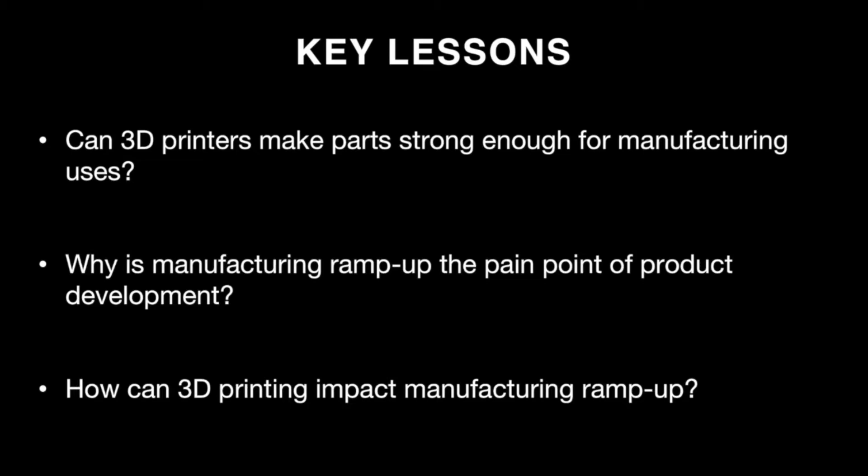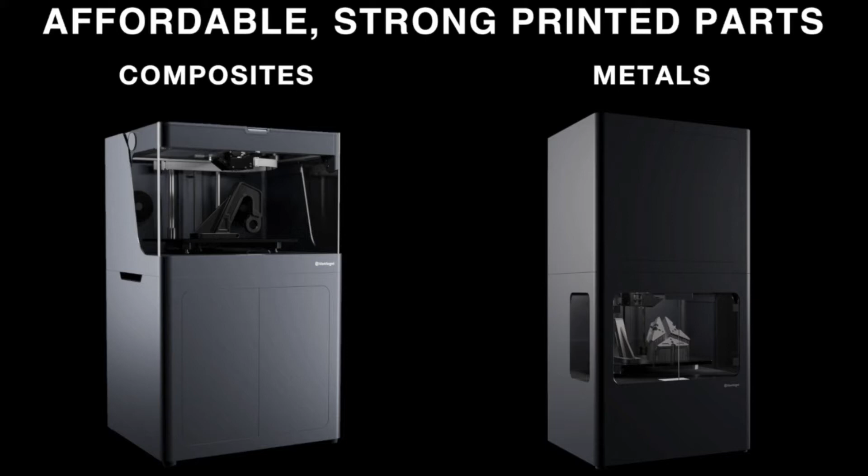First, we're going to go into why 3D printing can be used for manufacturing. A lot of the materials and tools used in manufacturing need to be very tough. Manufacturing tools experience repeated impacts, high temperatures, and lots of wear. Since 3D printing has been around for decades, many people have out-of-date impressions that it's either a cheap way to make fragile parts or a prohibitively expensive technology reserved for the highest value components. Markforged is upending those perceptions by selling affordable 3D printers capable of producing parts tough enough for manufacturing environments. Markforged has both metal and composite 3D printers, both capable of producing high-strength parts affordably and quickly.

So what do we mean when we say strong? Markforged metal printers print parts with strength comparable to that of their base material, 17-4 PH stainless steel, as you can see on the right. On the left, our composite printers are the only 3D printers on the market that embed continuous reinforcing fibers during the printing process to make parts that are 23 times stronger than ABS. This is just as strong as 6061 aluminum.

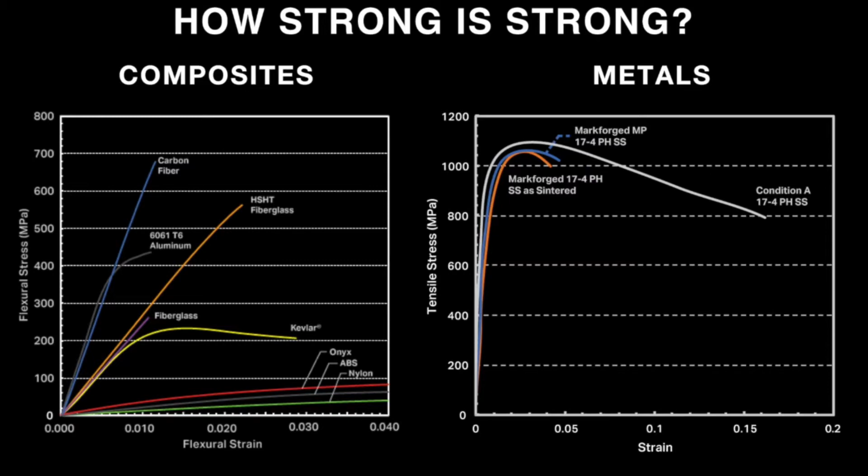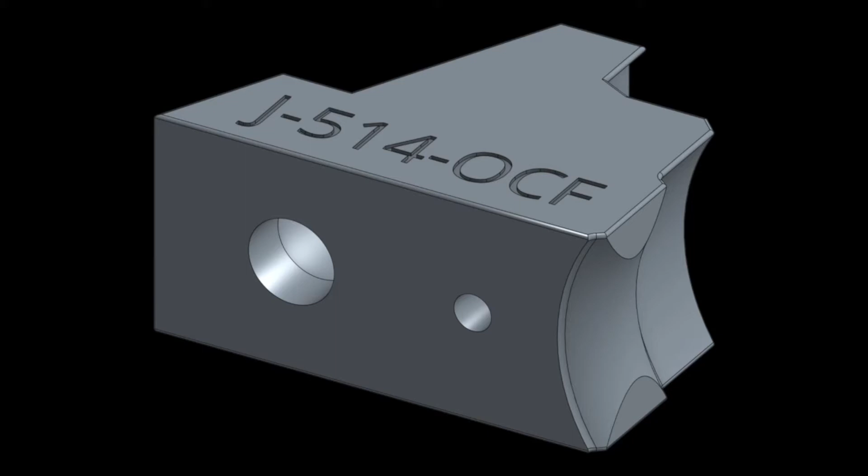Let's take a closer look at how this works. Here's an example of a customer of ours. They use composite 3D printed parts as end-of-arm tooling in their manufacturing automation cells. These gripper jaws experience repeated high-impact loads as they close around thousands of parts a day. Here's the model of the part, and we're going to take a cross-section to show you what our printers can do to this part internally. Here's the cutaway view of the part as shown in our slicing software to describe how our printing process works. There are two materials at play here contributing to the success of the part.

The white lines forming the shell and matrix of the part are a nylon chopped carbon fiber blend we call Onyx. This material is non-marring and chemically resistant to coolants and machining fluids found in manufacturing. The yellow lines encircling the perimeter of this part represent the embedded continuous reinforcing fiber. In this case, it's Kevlar.

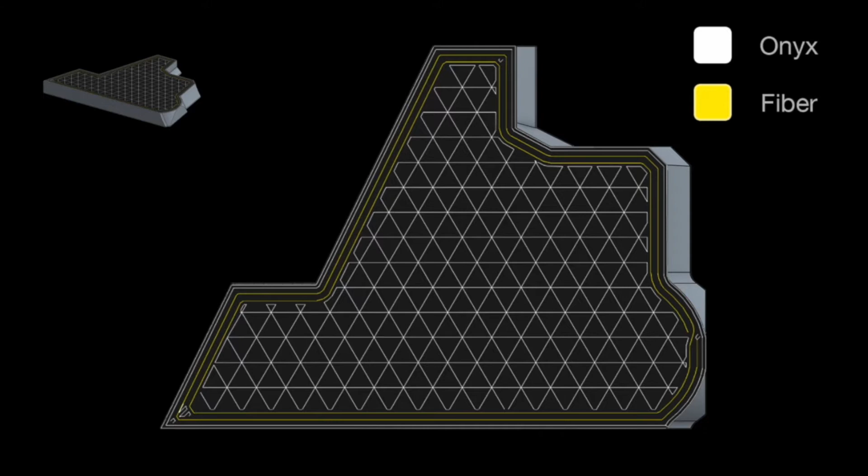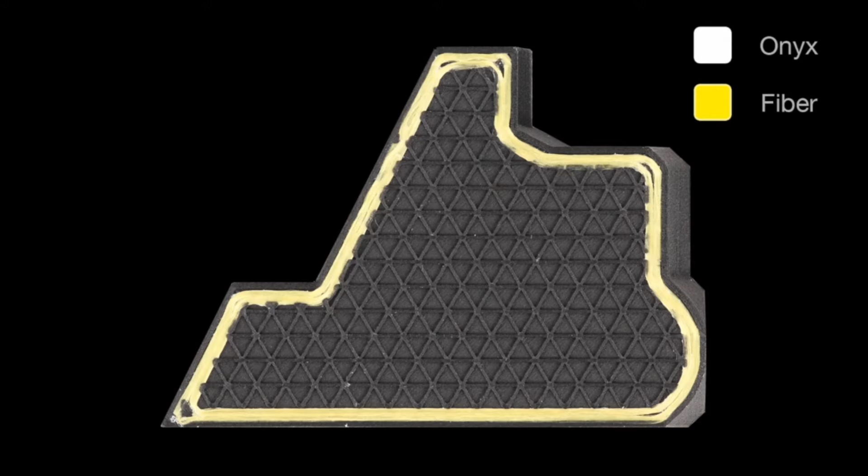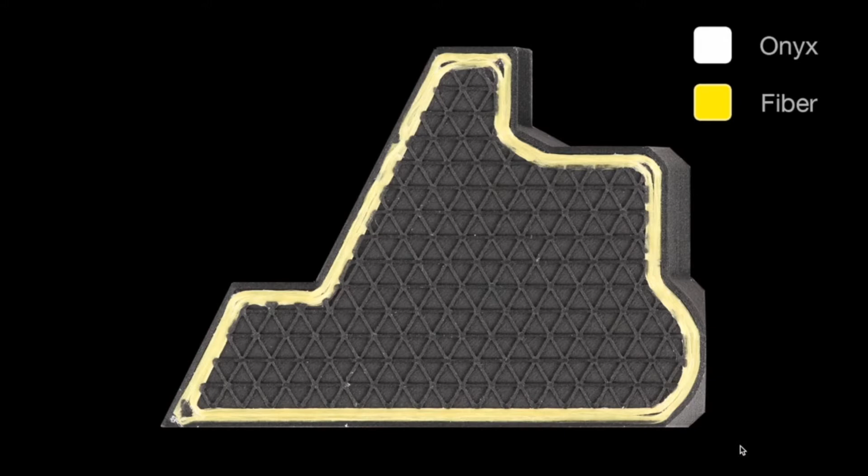Here we have that same cross section but with the real part now, so you can see what that Kevlar looks like in reality. The Kevlar is a continuous strand woven around the perimeter of the part. You can customize these reinforcing fibers and how they're laid out within your part to suit your strength needs depending upon your application. Here we've chosen to reinforce the shell of the gripper jaw because the load from the grippers gets applied on the gripping face of the jaw. The Kevlar fibers on every layer absorb this load by distributing it across the continuous strands, so the continuous strands are the key players in the part strength.

With different fibers and different reinforcement patterns to select from, you can optimize your printed part for its loading condition. With these high-strength 3D printing technologies put to work, our customer base has become worldwide, with local service and support from our network of value-added resellers. Our products are trusted by industry leaders in many verticals, ranging from manufacturing and automotive to consumer electronics. Our printers help these companies bring their products to market faster and cheaper by accelerating their manufacturing development process.

Now that we've explained why 3D printing can print parts strong enough for demanding manufacturing environments, let's dive into the pain points of product development. Hardware development starts with a concept. You've identified a need and envisioned a solution. You then take that concept and prove it out with a physical prototype.

Once your prototype looks and acts like you expect, the next step is tooling development. This is where you need to take your single model and figure out what is needed to make hundreds to thousands of it. You need to design your tooling and process to successfully produce your first production unit, and then launch production where you can focus on product and line optimization to increase yield and make more money.

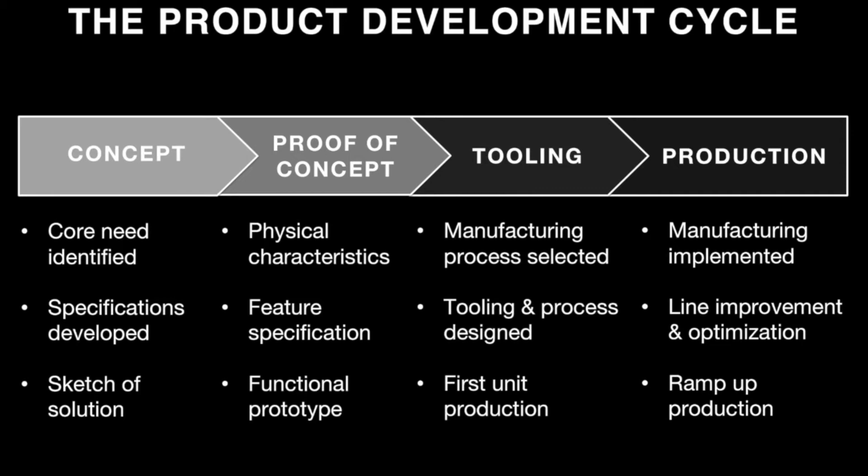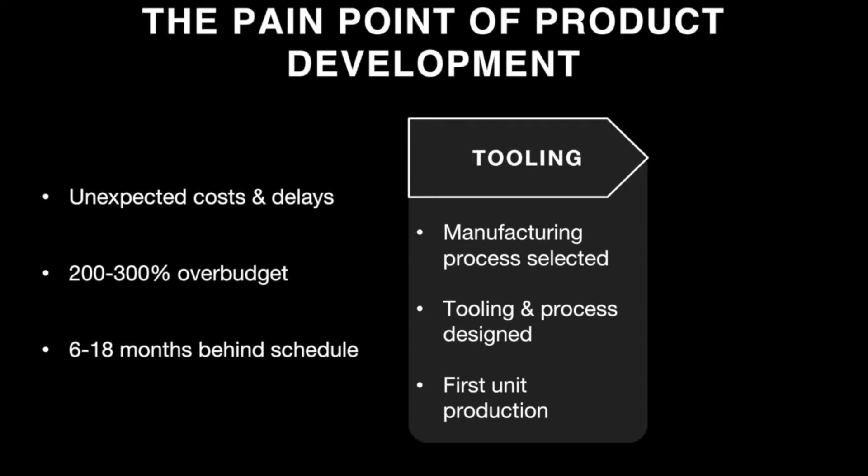So the real pain point of product development is tooling. Ramping up the tooling for your manufacturing line is laden with unexpected costs and delays, is usually 200 to 300% over budget, and can be 6 to 18 months behind schedule. As a result, tooling becomes the most arduous and least efficient aspect of moving your product from your prototype to your production run, and no hardware product is immune to it. Let's dive deeper into why that is. Here's an ideal workflow for production line development.

Numbers and steps can vary quite a bit depending upon the industry, materials used, and the size or complexity of the product that you're making, but these examples should give you an order of magnitude sense for how cost and time distributes in tooling development.

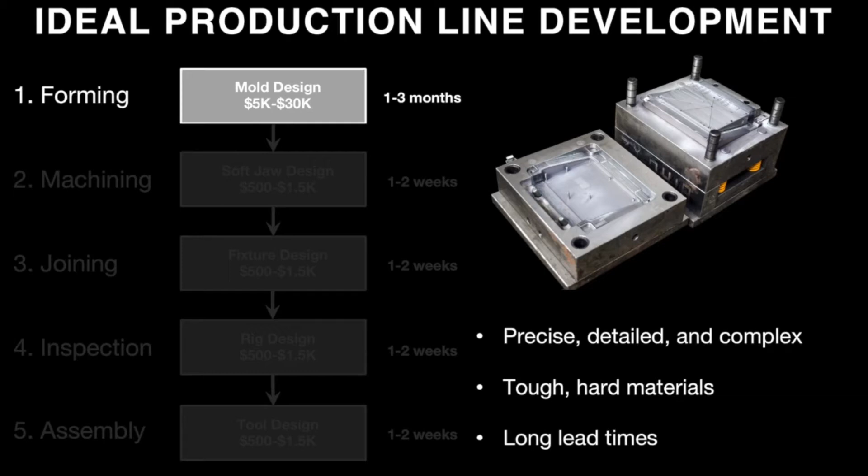First, you make your forming tools: injection molding, die casting, stamping, things like that, often forming the largest and most complex parts in the product like the casings or housings. Tooling for this step is usually expensive and time-consuming. Parts need to be machined and finished, often by a third-party service, and molds are made out of incredibly tough materials like tool steel so that they can endure the stress and heat of thousands of mold cycles.

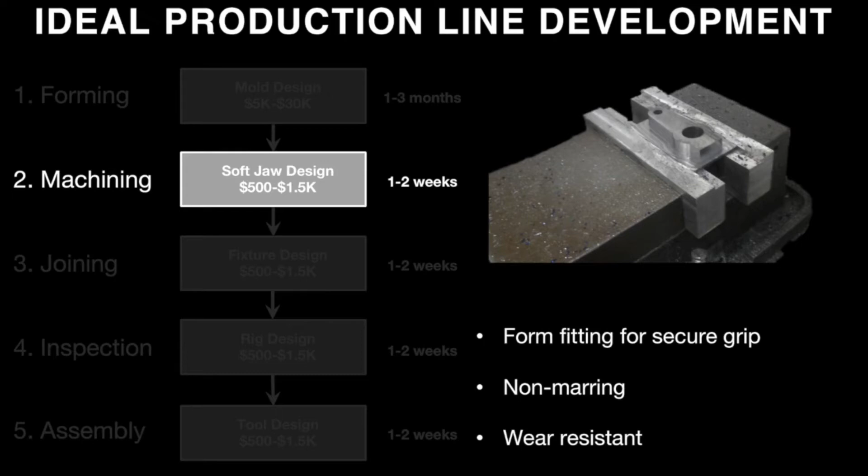The next aspect of tooling development is machine work holding. In some cases, especially with forming processes like die casting, parts need to be post-machined for precision. In other cases, you may have other custom components to your product that just get machined from the start. These parts all need work holding with a few key requirements: it needs to securely hold the part through many machining cycles without degrading, and it needs to be non-marring so that it doesn't scratch the product.

Our next step is joining. When I say joining, I'm talking about things like traditional metal welding, as well as processes like sonic welding or gluing. Fixtures are often necessary to align multiple components for whatever joining process you use, and need to hold those parts precisely and securely during the process. Some fixtures, like this bicycle welding fixture, can be modular to account for multiple sizes and styles of frame, while others may need to be highly customized and precise to allow for perfect alignment of components.

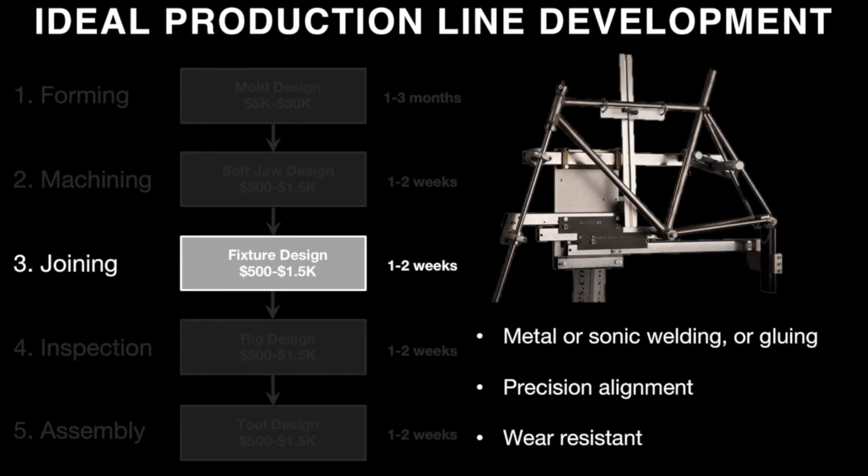So next we get to inspection. Whether you're running products or parts through a test rig for strength validation, or simply measuring a part with a CMM machine to make sure it meets specification, these steps need rigs or fixtures as well.

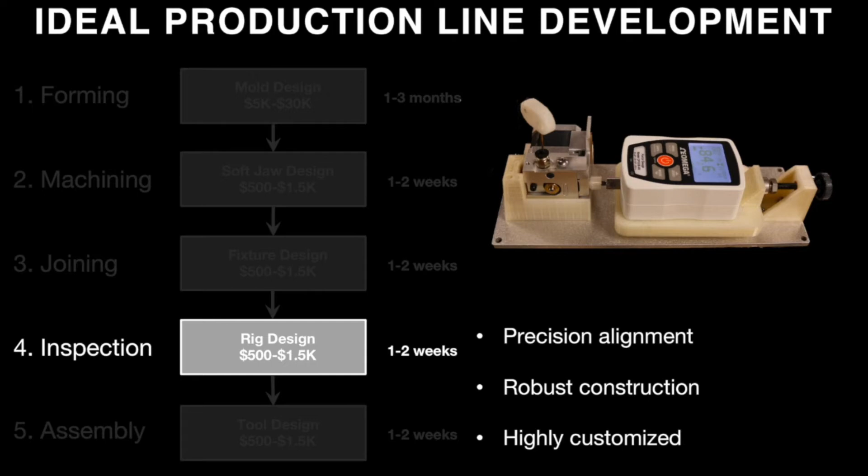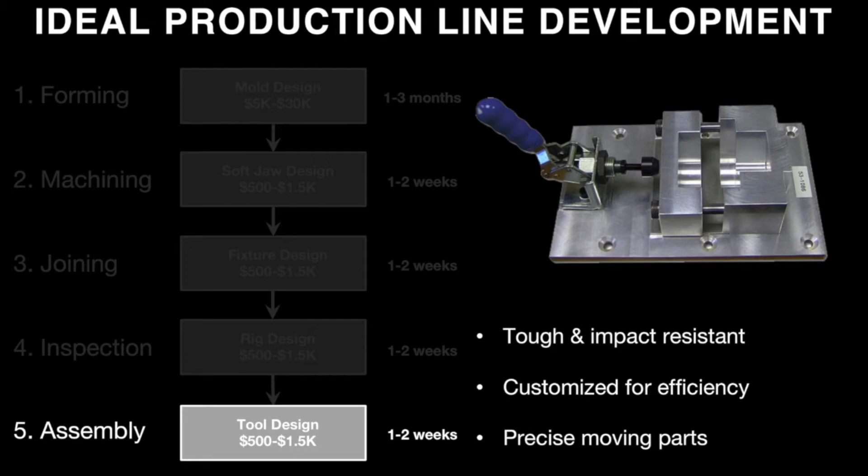And now for our last step in the line, assembly. All the parts are made, verified, and now need to get put together. Not everything needs an assembly fixture, but if you want your production line to be efficient, developing custom tools to help assemble your product makes your workers' lives easier and means more products in less time. This means your line has a higher yield and your products are less prone to assembly issues.

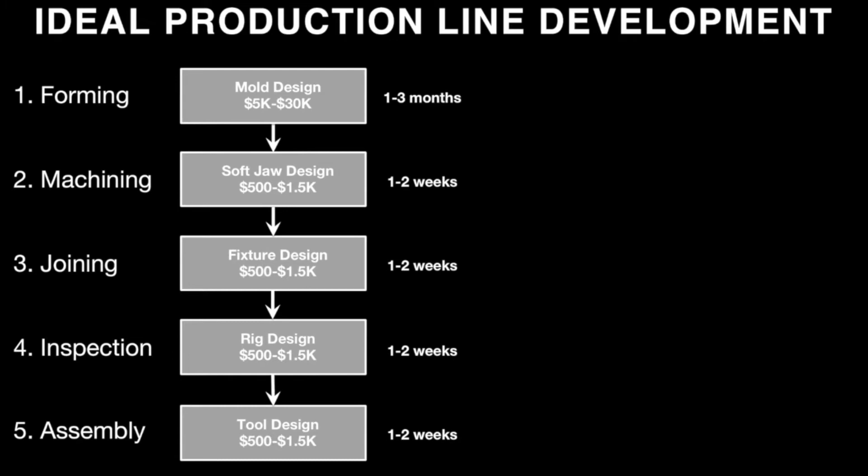So you may think at this point that you're done. These are the major process steps in manufacturing, and once the tooling for each step is done, you can move on to the next one and get your line running. However, the big time and money sink, and where the big struggle lies in production line development, is all in the iteration. Each of these tools needs improvement and fine-tuning to get working right. These iterations are why product launches get months to years of delay and usually end up 200 to 300% over budget.

Each tool in your production line needs iteration to be successful. For example, a flaw in the injection mold design could cause flow issues with how the plastic fills the mold, meaning the parts it produces are out of spec. Another example: the first revision of an assembly fixture could create a flaw in how some of the products are being assembled. This drops the yield of the assembly line and means that until that issue is fixed, your production line will not be running at full speed.

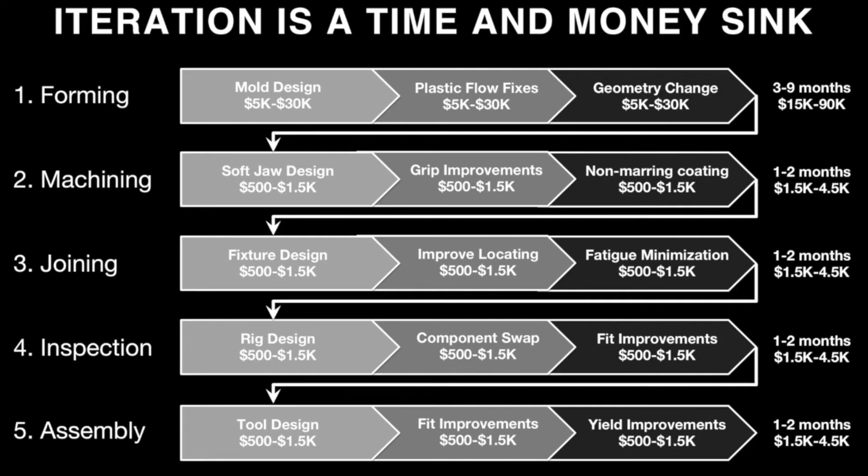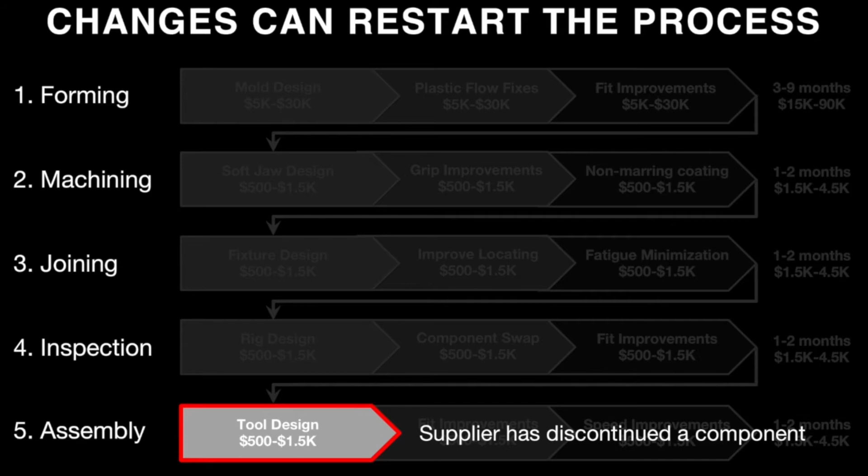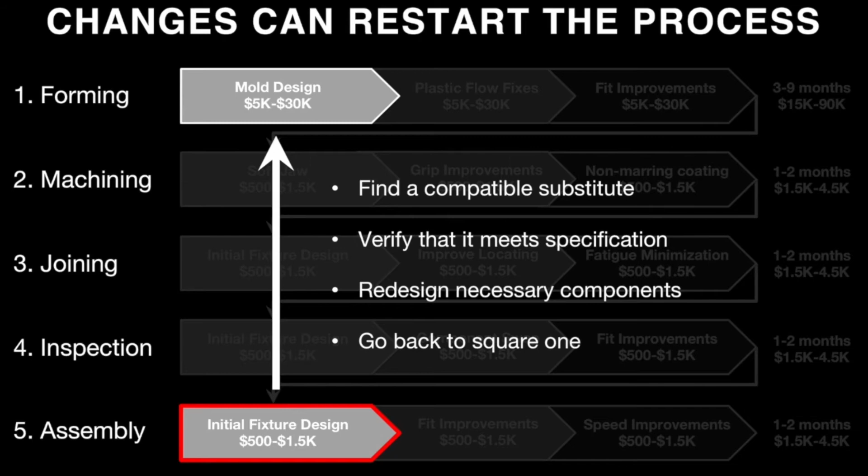Sometimes there can be severe issues downstream that require a slight product redesign. For example, a supplier for a critical component of your product could discontinue or update that component. This causes changes to your product and may force you to reevaluate your product's design. Before you know it, you could be sent back to square one. You'll need to find a compatible substitute, verify that it meets specification, and redesign your product to make it work. The whole process change equates to thousands of dollars and months of work that you may need to do all over again.

And there are a bunch of other reasons to get pulled back to square one as well: supplier changes, alternate subassemblies for product differentiation, or a change in the process that's made after production ramps up. These all create edits to the product that have the potential to restart the process over and over again.

All of these improvements could be critical to your product or could improve its success substantially. However, all of these come at a cost. You need to run through another iteration of tooling design. In some cases, you may not need to go all the way back to the beginning, because you never know what unexpected roadblocks could come up and where. But that does not mean that you are free from the cost of another iteration.

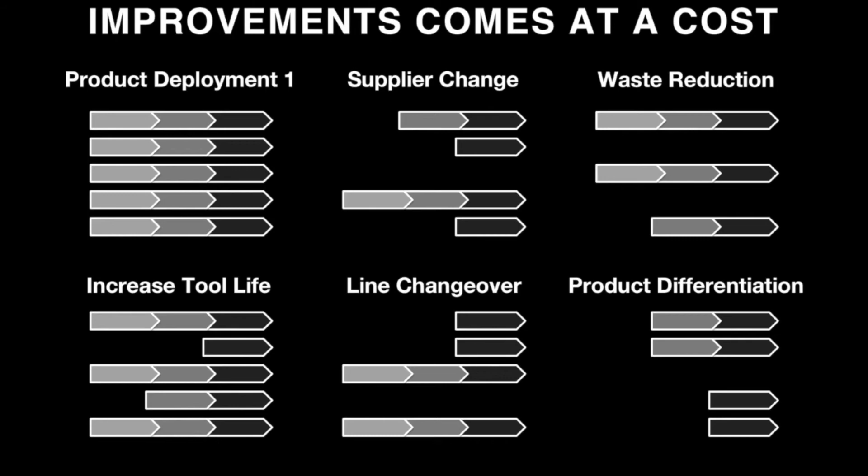So where does 3D printing fit into all of this? We know that high-strength 3D printers with continuous strands of composite fibers can create tooling and fixturing capable of handling manufacturing applications. So now we're going to go into how we can take this timeline and cost estimation and turn it into this.

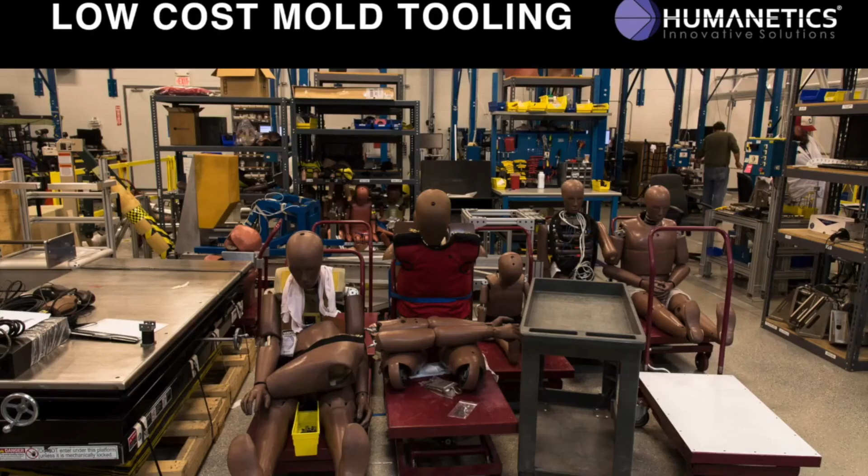Let's look at some examples. So back to the first step of forming. I'm going to talk briefly about a customer example for this one. One of our customers, Humanetics, makes crash test dummies for safety testing.

One of the parts they need to make for these dummies is the silicone neck ring. They used to have to get these molds machined, and due to the complex geometry of the neck ring, they were extremely expensive, costing near $20,000 to produce. They can now print continuous fiber reinforced molds for this application for only $130.

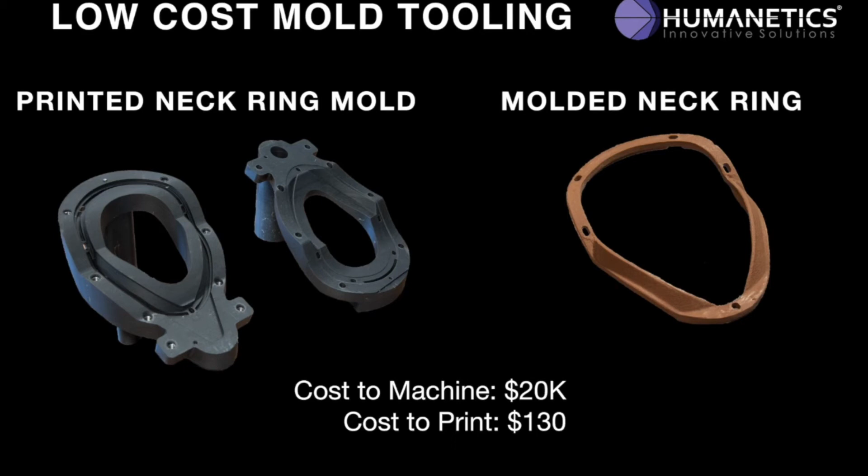The printing process makes these molds extremely affordable, and they can have these molds ready to go in days. Just for this one part alone, they have reduced the mold cost by 99%. So the cost and time of the forming tool process drops substantially with this application.

These jaws are non-marring and tough, so they don't scratch the parts, and are conformal, so the jaws match the curvature of the part that's being machined, making it a very snug fit and very tough and able to endure many machining cycles. Normally, conformal jaws are a compromise because they entail higher feature complexity when machining the jaw itself.

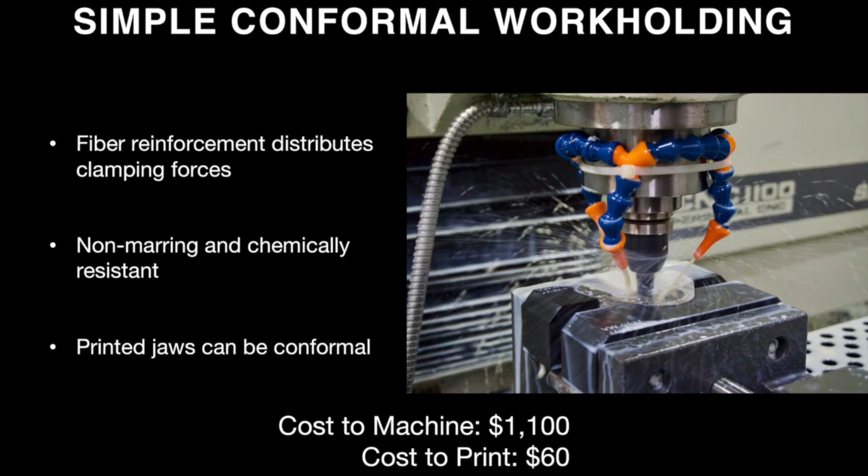This increases the cost of the jaw substantially, but here we can save about 95% on cost, and again, these can be printed overnight. So we can cut the machining work holding iteration process down by that much as well.

Next is joining. The high heat deflection temperatures of our composite parts make them suitable for MIG and TIG welding, and precision alignment features can be designed into these fixtures to help with component alignment before the process.

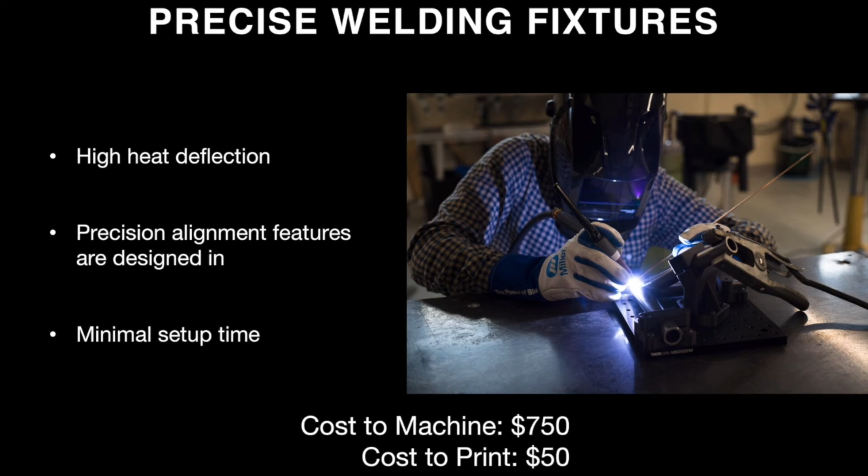This can be done for gluing and sonic welding as well. Overall, you can use custom joining fixtures to reduce setup time of the joining process and ensure precise alignment with custom features to help line up your parts. So these costs drop as well.

Even if you're using the 3D printed components for just the first and second iterations of your fixtures and machining the final version as you refine the process, you're still already saving thousands of dollars and weeks of time integrating 3D printers into your manufacturing ramp-up workflow.

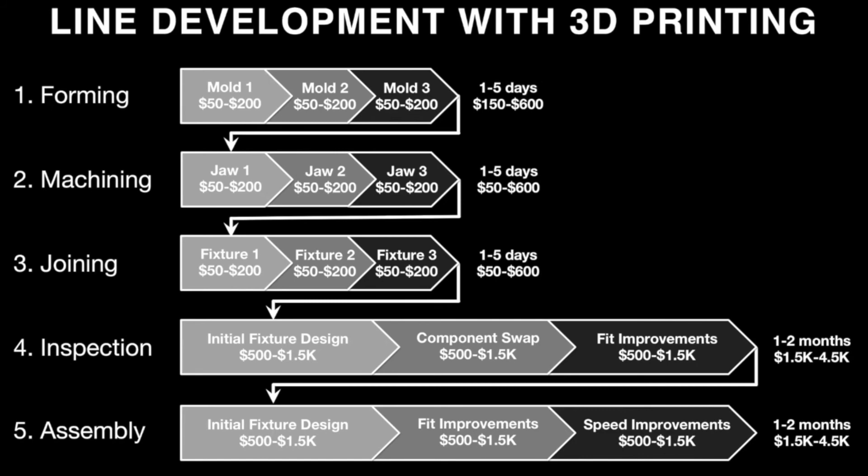Next is inspection. Traditional inspection fixtures are usually very generic and can do a lot of different things, but have a high associated setup time. With our printers, you can design standalone inspection fixtures that eliminate this setup time and precisely locate the parts to obtain accurate measurements for inspection.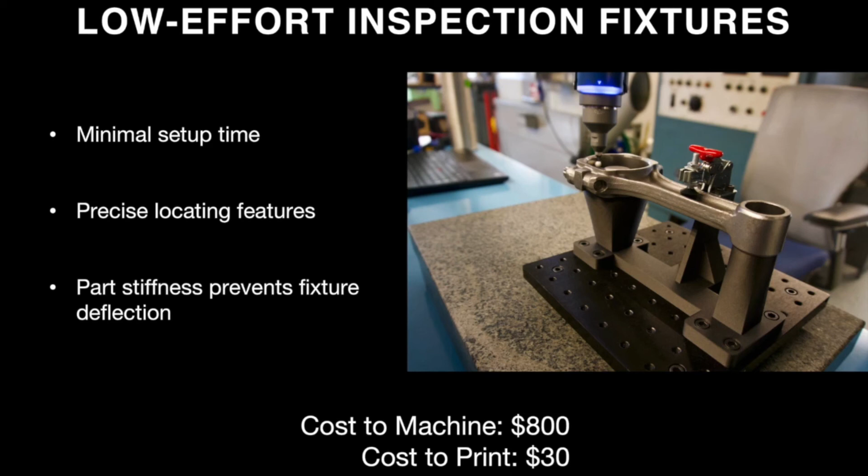And we talked a bit earlier about how this relates to testing rigs if your products need to undergo testing for quality verification. Our printers can help here too, providing high-strength parts for testing rigs next day. So again, this drops the time and cost.

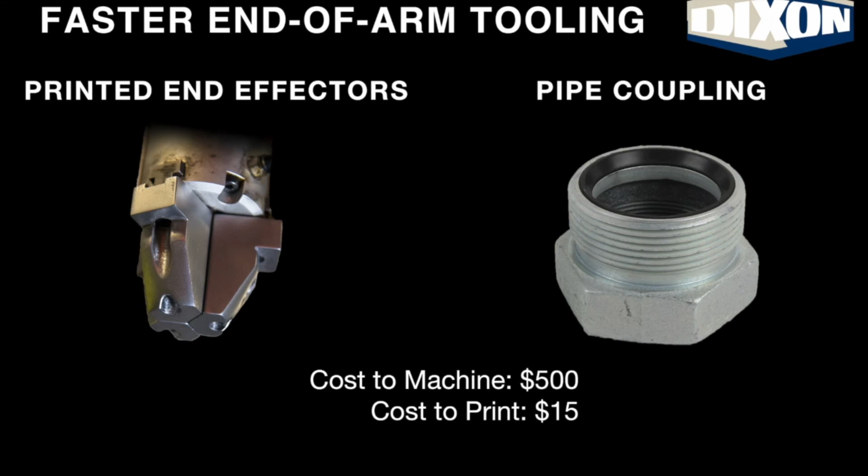Our last stop is assembly, and we'll share another customer example here. One of our customers, Dixon Valve and Coupling, uses our products to simplify ramp-up of manufacturing lines for new products by 3D printing the end-of-arm tooling for their automation lines. They create these pipe couplings that have a gasket pressed into the top of them, as you can see here.

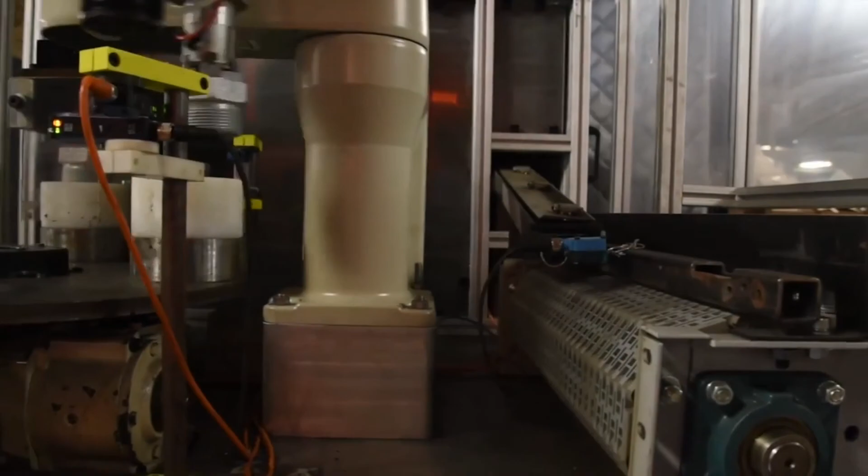Dixon Valve uses these metal printed end effectors to pick up, place, and put down the threaded couplings in their manufacturing cell. They can get these jaws turned around in days instead of waiting weeks for their parts to return from the shop, and in addition, the 3D printed metal grippers are lighter than traditionally machined jaws.

This means that they can both ramp up their line faster and run their line faster, producing higher yield and getting the line up to speed in less time.

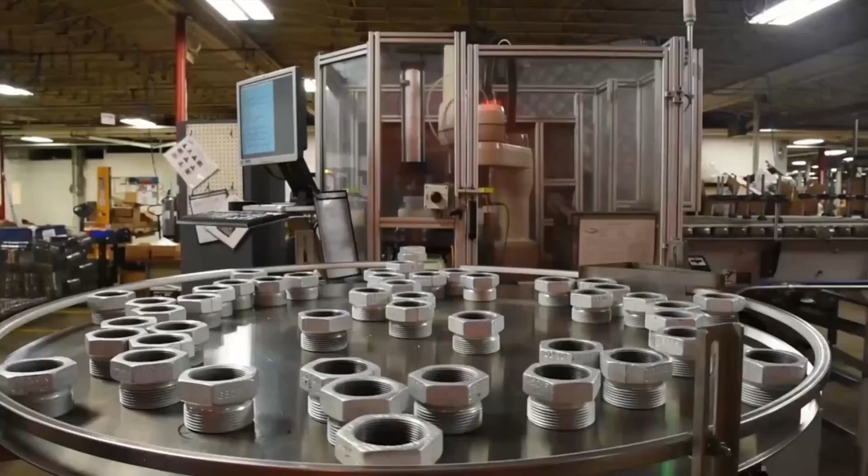For each project in which Dixon Valve incorporates high-strength 3D printing, they save roughly $35,000 because they cut down on all of the iteration cycles and associated costs across their entire line. So their costs can drop from thousands to hundreds, and their iteration cycle drops from weeks to days.

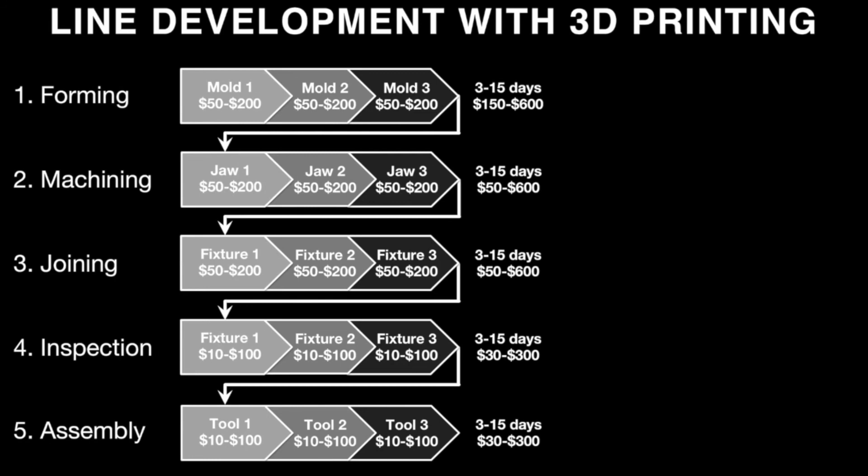This means they can get new products out to market faster and for far cheaper than they did before when using traditional methods. So in general, comparing the traditional manufacturing ramp-up of long lead times and high costs to using 3D printing for making your tooling and work holding, you can introduce substantial savings to your product line.

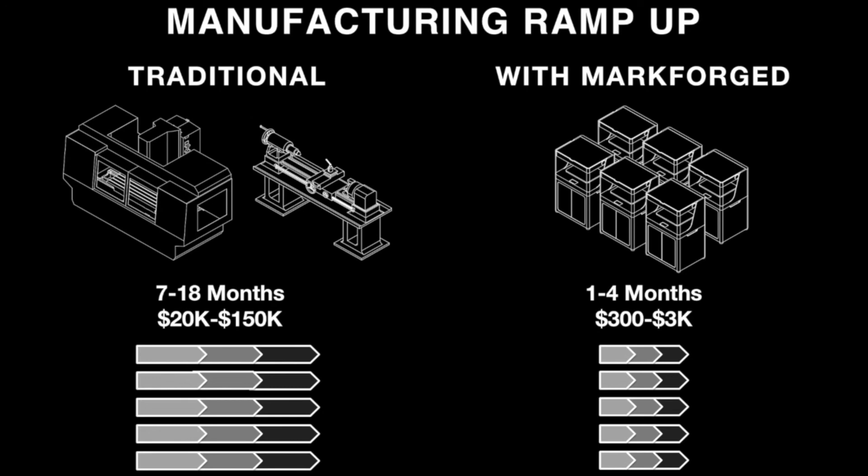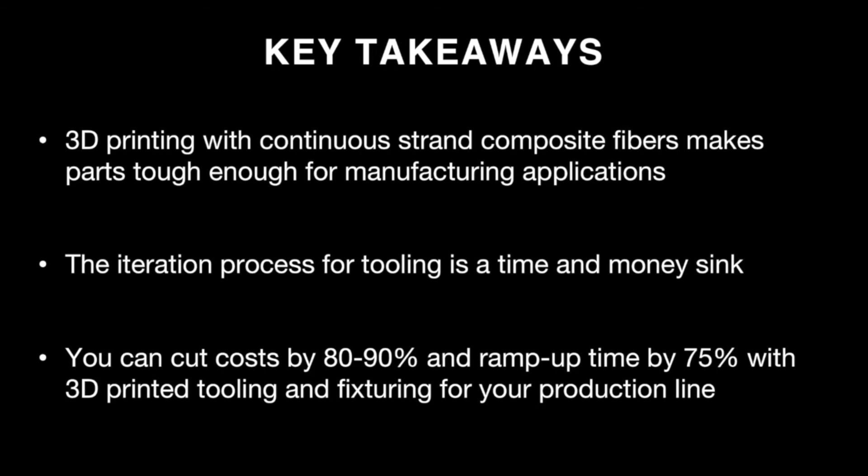Engineers spend half their time waiting for parts to come in. With Markforged, you can print them out and install them on your line next day. So 3D printing with continuous strand composites or metals can provide an avenue for affordable, same or next day strong parts. By 3D printing your tooling and your fixturing on your manufacturing line, you can cut costs by 80 to 90% and decrease your production line ramp-up time by 75%.